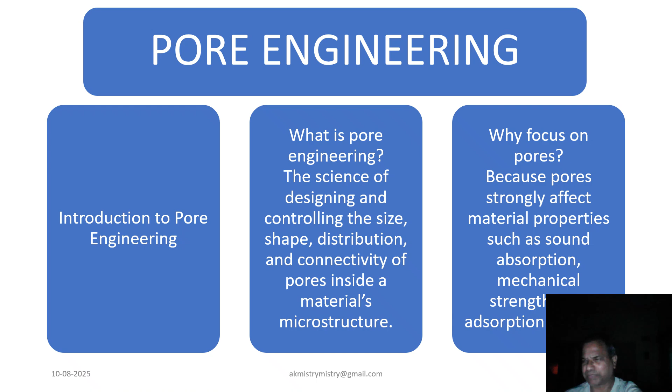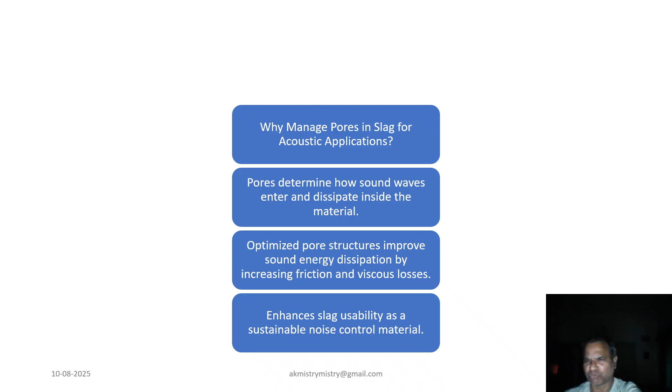Now coming to our next slide, which is about why manage pores in slag for acoustic application. Slag is a byproduct of steel and iron production, and it can be reused to make acoustic material. The reason we focus on its pores is simple. Sound waves interact with these pores first. When we optimize pore structure, sound waves lose more energy inside the material, improving noise absorption. This makes slag not just a waste material but a valuable, sustainable resource for noise control.

Now, key pore characteristics in acoustic materials. Four main pore characteristics affect acoustic performance. First, pore size. The best size range for absorbing sound is about 25 to 100 micrometers. The second, pore distribution. We want a uniform size spread plus a mix of small and large pores for different frequencies. Third, pore connectivity. Interconnected pores make sound travel longer paths, losing more energy. And finally, total porosity, which is the percentage of the material that is empty space.

So the main success is behind the pore engineering. If we engineer the pore structure, the pore architecture, the pore distribution, and the pore sizes well, then we succeed in obtaining maximum sound absorption capacity of these pores.

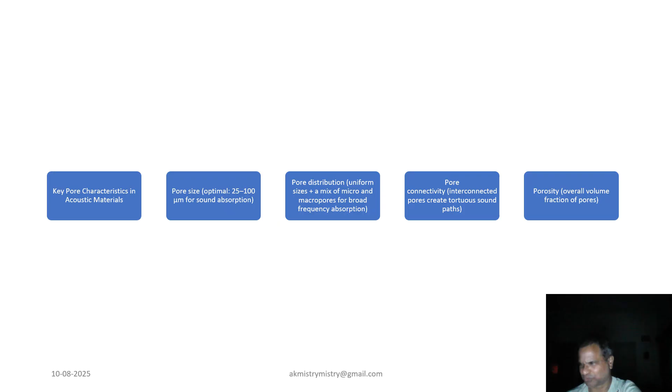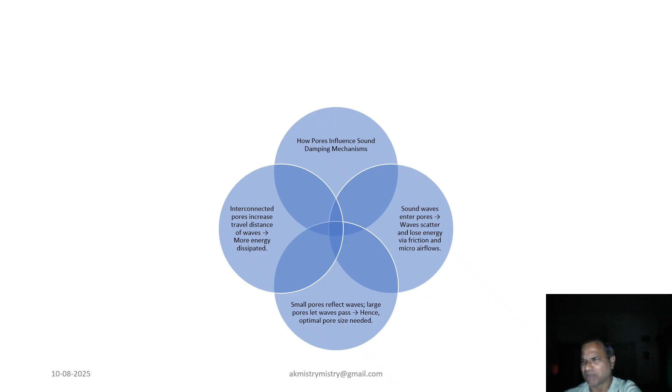Now coming to this slide, which is about how pores influence the sound damping mechanism. When sound waves enter the pore, they scatter and lose energy because of friction and teeny air movement inside. Very small pores tend to reflect sound, while very large pores let sound pass without much loss. That's why an optimal medium pore size works best. Interconnected pores force the sound to travel longer, more complex paths, which increases energy loss and improves the damping capability.

Now, in this slide, we are going to talk about how pore size distribution can be controlled. We can control pore size with different methods: physical foaming, such as gas injection or adjusting mixing pressure, controls the initial bubble size; chemical foaming using a blowing agent or chemical reaction regulates how much gas is released and how fast; changing the binder or polymer content adjusts viscosity, which affects how bubbles grow or merge. Temperature and pressure during foaming also influence how big and how uniform the pores are.

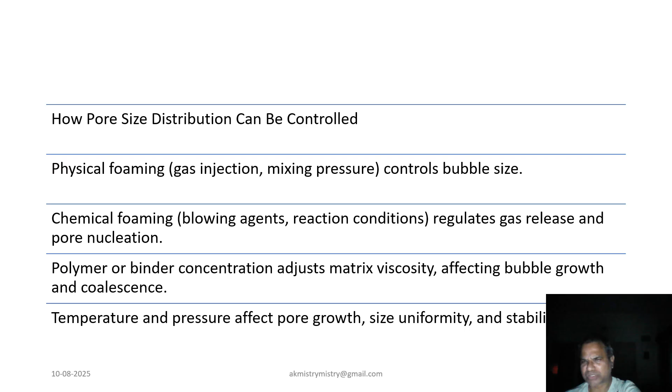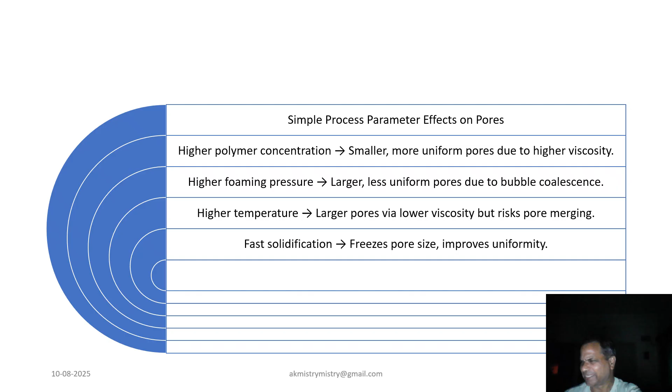Now, in this slide, the effects of process parameters on pores are shown. In simple terms, higher polymer concentration gives smaller and more uniform pores because the mixture is thicker. Increasing foaming pressure makes larger and less uniform pores. Higher temperature reduces viscosity and allows larger pores to form, but too high can cause pore merging. Fast solidification freezes the pore structure in place quickly, giving better pore size control.

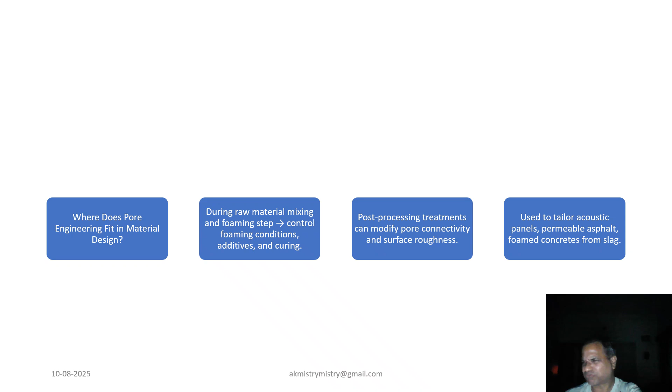Now, where does pore engineering fit in material design? Pore engineering happens during material production, mainly during mixing, foaming, and curing. This is when we can control foaming conditions, additives, and setting time. Even after production, post-processing treatments can adjust pore connectivity or surface texture. In practical use, pore-engineered slag is applied in things like acoustic panels, permeable asphalt, and lightweight foamed concretes.

So why start with pore engineering? We start with pore engineering because pores are the first microstructural feature that interacts with incoming sound. If we control them well from the start, we ensure the final product has the right acoustic performance. It also lets us design the material for specific noise frequencies while keeping structural strength and sustainability in mind.

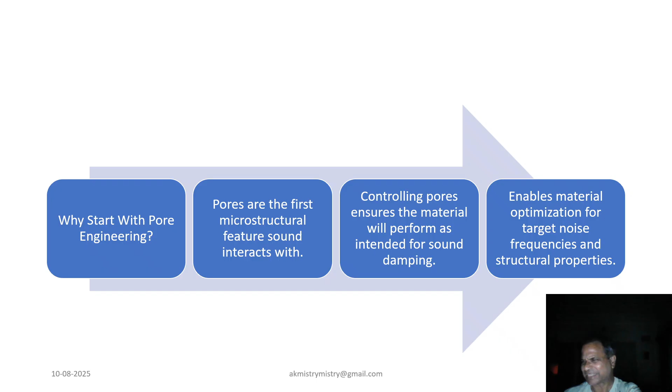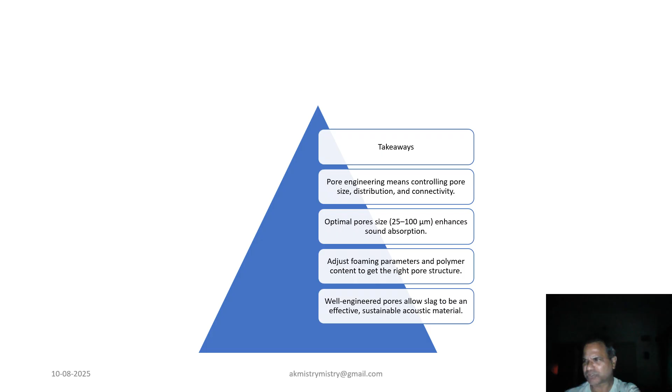Simple takeaways: to summarize, pore engineering means designing the size, distribution, and connection between pores. The best pore size for sound damping is about 25 to 100 micrometers. We can control pore characteristics using foaming methods, process settings, and material composition. With well-designed pores, slag becomes an effective, eco-friendly material for sound absorption.